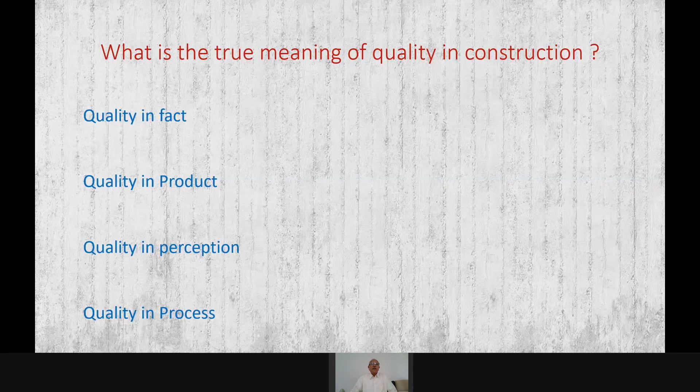So we will go one by one. What does this mean? Quality in fact means a product or service that meets the specification and truly exists - I say truly exists because many times we hear that something exists on paper only.

Quality in product relates to the physical product itself - that is the dimension, slope, strength, serviceability, everything. Then quality in perception - this is the perception of the end user regarding the product.

Now I will explain this with the example of a concrete road. If you see a concrete road in villages or a small town, you will find it is made of only 6 inches thickness, or even 4 inches in a village, limited width, and the surface is very uneven. Joints are filled or non-filled, maybe with bitumen or not, and the texture is very, very rough. The strength may be only M20, M25.

But if you go to the villagers and ask them, how do you find this road? They will answer, sir, this is one of the best works ever done in our village. Because initially during the monsoon season, everything used to be muddy - it was a hell of a trouble for us. Now this road serves many purposes.

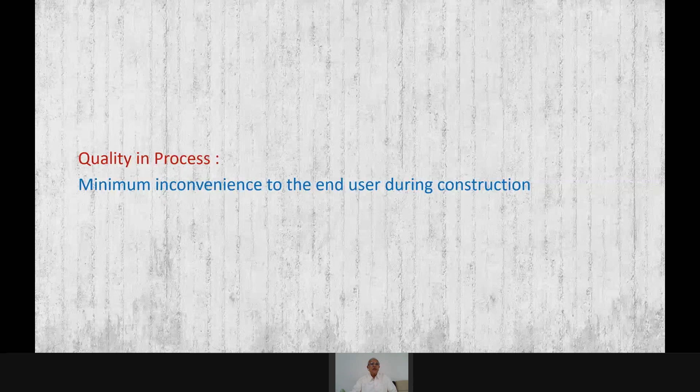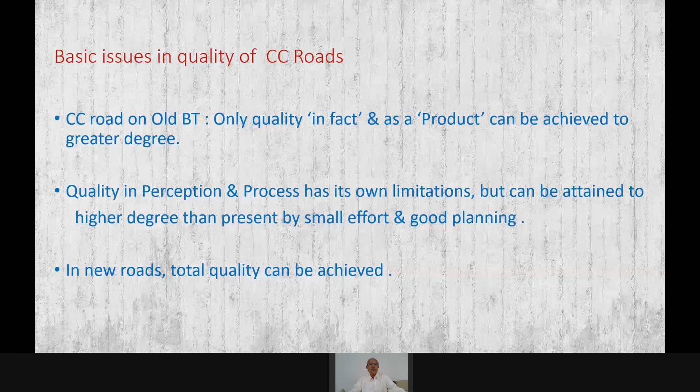The basic issues in quality: there are two things we find when a road is constructed in the city by removing the BT surface. We can create a good product, but we can lose on the ground of perception and process. But if it is a totally new road, constructed outside the town, then we can achieve total quality. So we'll see one by one how it is achieved.

The main factors affecting quality: first is the DPR, the detailed project report. Second is the quality of the construction material we are going to use. And third is the process of construction.

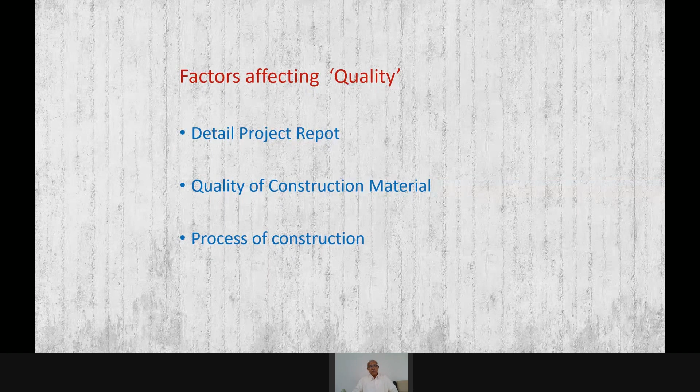Talking about the DPR, unfortunately it is never detailed enough. DPRs are prepared by inexperienced personnel many times, but cutthroat competition compels the consultant to minimize field work - investigation, survey, borrow area investigation, all these things. There are impractical time targets for DPR as well. Then there is inadequate soil assessment and almost no borrow area investigation. Unfortunately, the owners are not aware of the huge time and cost overrun because of these issues.

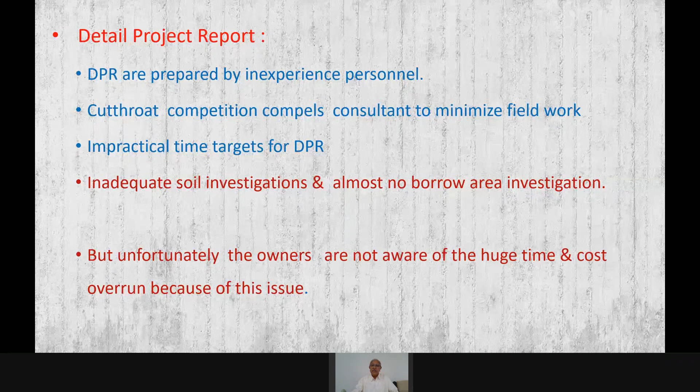I will go a little out of subject and show 2 or 3 slides on how we can suffer because of inadequate soil investigation. See this graph - if there is no investigation, your cost of construction can be as high as 100% above the predicted, and it goes on reducing as you invest in investigation.

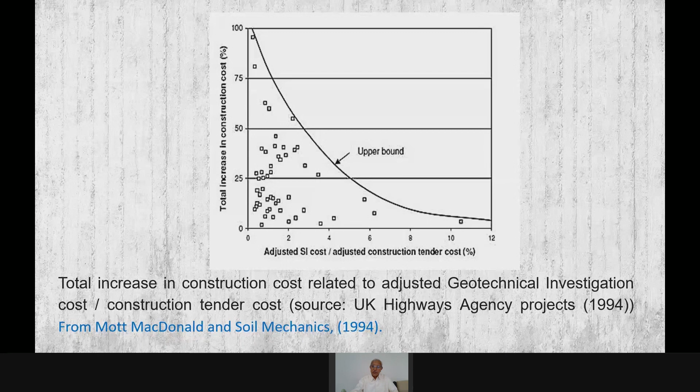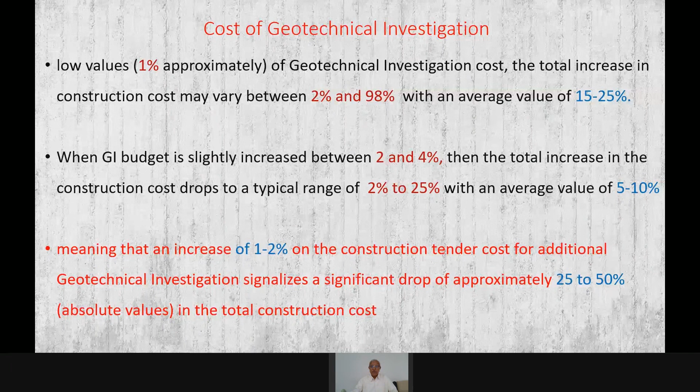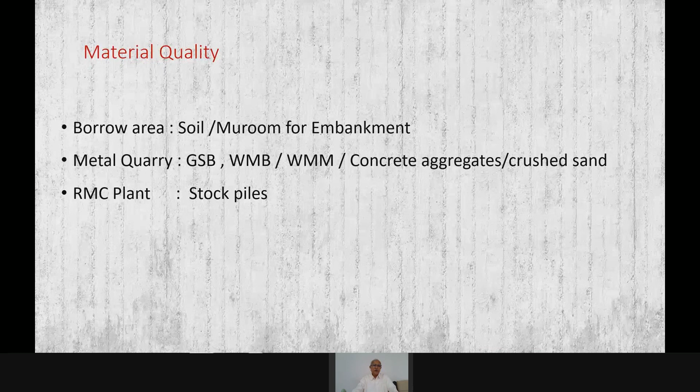Now going to material quality, we'll focus on borrow area investigation - the soil murum required for the embankment, and material required for the granular subbase, water-bound macadam, wet mixed macadam, concrete aggregate and crushed sand. We are not touching cement and admixtures or fibers because these are manufactured in factory under standard conditions and generally meet the standard specification, so we will not touch that here today. Third is the stockpiles at RMC.

Now this is another quarry investigation we did for a big project - a 340 crore project, almost 50-60 kilometers of concrete road. This material was investigated, and 6 quarries were identified during the DPR stage. When construction commenced, the department called us in to verify the material at the quarry. Out of the 6 quarries, only 3 satisfied the material requirement - quarries number 2, 3, and 4 - the rest did not meet the 8 CBR material requirement.

If you go into detail, even the PI value of quarries 2 and 3 was not up to the mark. So even if you approve these 3 quarries, the total quantity available is not sufficient, because these quarries are located away from all the points - they are in a specific location, and the contractor is not going to get material transported 50 kilometers. About this 8 and 9.5 CBR, I will explain further how this is also not possible.

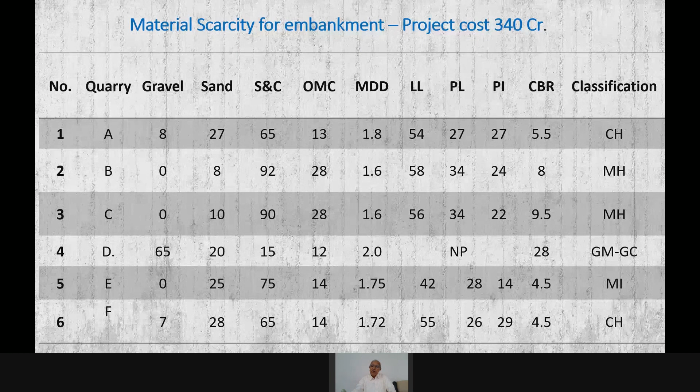So accordingly, we drilled 1 bore, 20 meters deep. The core records were excellent, everything was good. They established their plant and quarrying started, and they also started construction of the national highway. Initially they quarried the material for the GSB, and almost 1 kilometer of GSB was laid. Then the quality control team of the national highway visited.

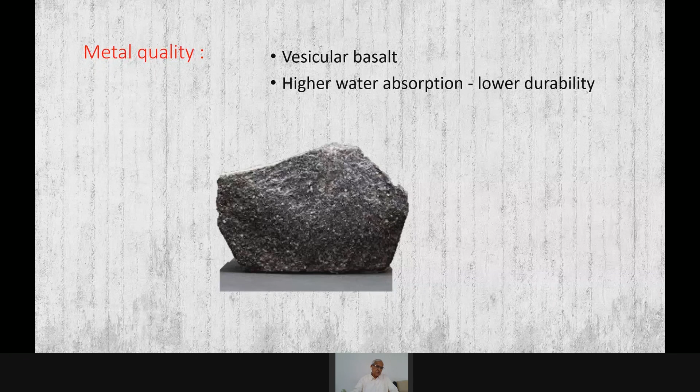And seeing this vesicular basalt, they rejected not only the material laid, but also the quarry. So the owner had to shift this entire quarry plant to a new location. You can imagine the time and cost overrun. So this is very important.

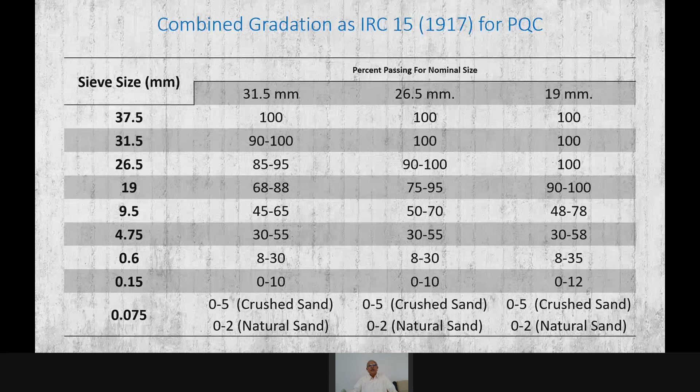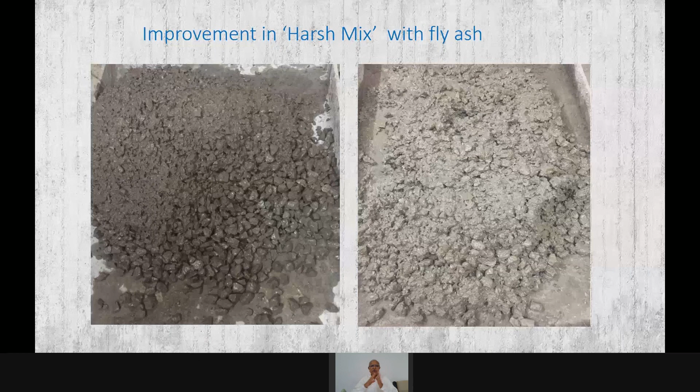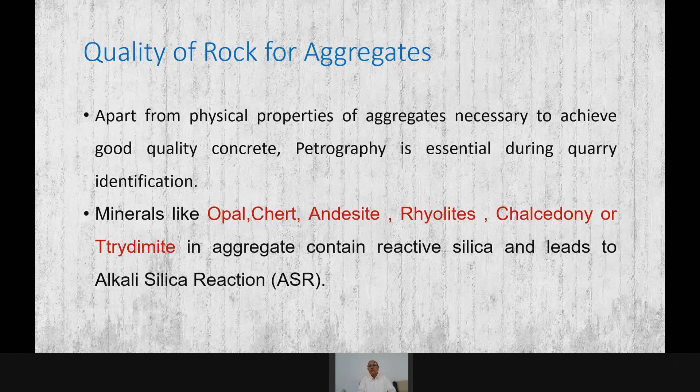See, for rock quality aggregates, we know that we don't want flaky, elongated, oversized, undersized aggregates - everybody knows that. I will insist on one part only, that is the petrography. Because minerals like opal, chert, andesite, rhyolites, chalcedony, tridymite contain reactive silica and lead to alkali silica reaction. So we must do petrography analysis of the quarry samples.

Then fine aggregate - now we are using mostly crushed sand, no natural sand is available. This affects the cohesiveness, workability and finish. This is the main thing - it affects the strength, and if optimized can increase the strength also. It shall be well graded, and each particle size of the fine aggregate has its own importance.

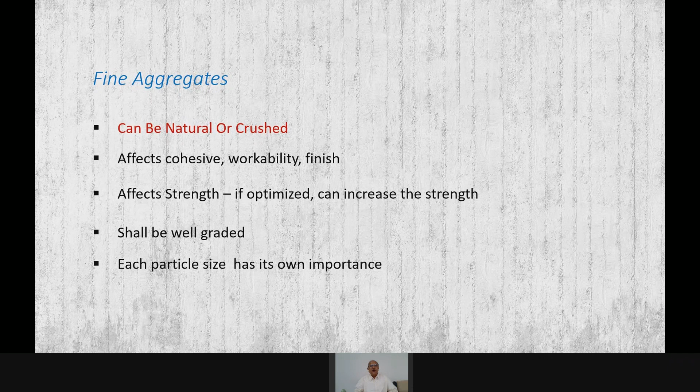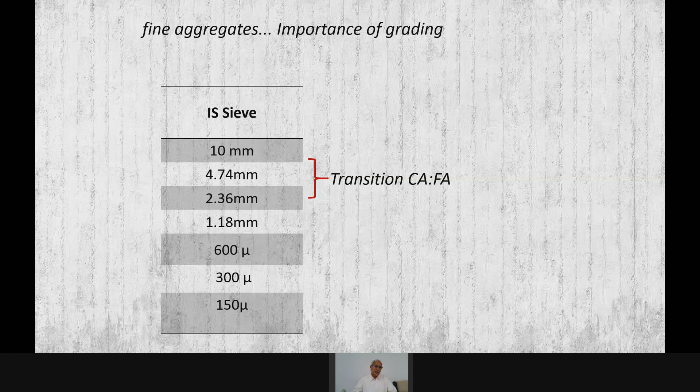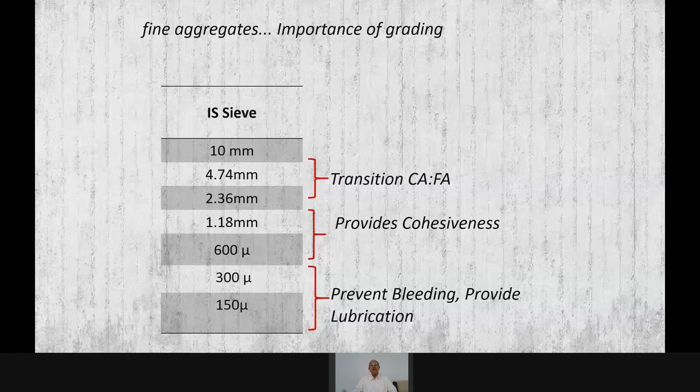So in short, this is the general aggregate size we use in fine aggregates. If you see the first two, 4.75 mm and 2.36 mm, this size is a transition zone between the coarse aggregate and fine aggregate - this material serves the purpose of transition. The two sizes 1.18 and 600 micron provide cohesiveness to the concrete mix. And the last two sizes prevent bleeding and provide lubrication to the concrete mix. So each size has its own importance.

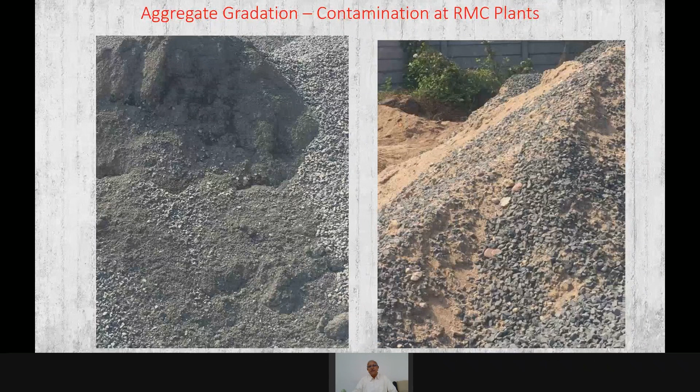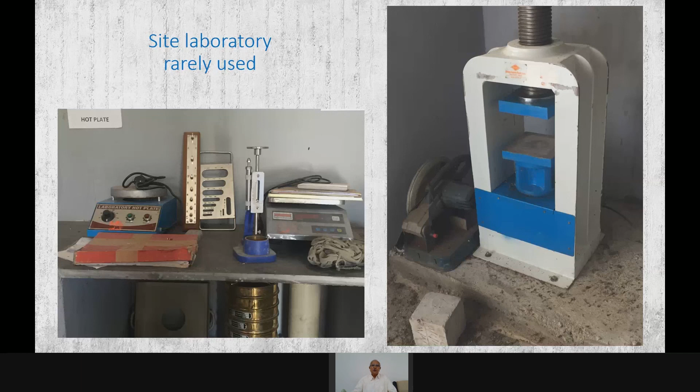And if you see the site laboratory of any contractor, I don't know why they have apathy towards the site laboratory. The instruments are placed but never used, and the quality of the instruments is also not good. You see, these instruments are never touched.

And this is the condition of curing tanks. A curing tank has to be planned - you could see this beam. If you ask the fellow to test the beam of a particular week, you see it is hidden inside. He has to remove everything, and even then it is not immersed in the water. The water has not been changed for weeks together.

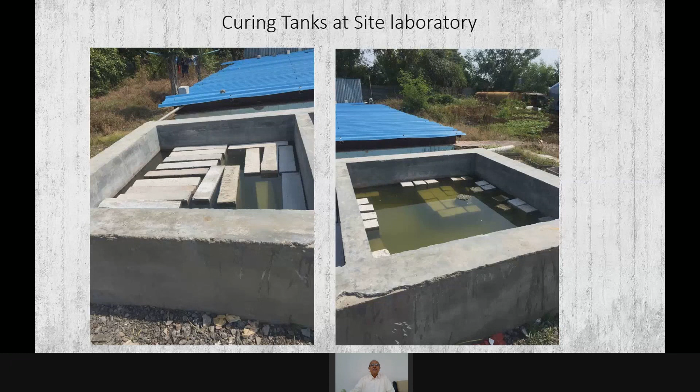So what we have to do is focus on quality and process. We have seen the material aspect; now in process we have two things - one is the personnel, another is the machinery and work methodology. All the personnel at site and in office should be trained. They must know each and every aspect of the construction, material and process at site. The training should be meaningful and practical.

And for construction of any layer, the trial patch is a must. Suppose we are doing the embankment - we take a trial patch of 50 meters and ask all the personnel to remain present, right from the laborer who is going to spread, to the roller driver, to the tipper person, to the engineer, to the site person, and to the office person - everybody.

And you spread the material. Generally what is the practice? The tipper will come, unload the material, the JCB will spread it. It will not be in a layer of 200 mm, 250 mm - it will be as thick as 300, 400, 600 mm, and you will just roll on the top. You will never achieve the desired compaction.

So in the trial patch, you spread the material, sprinkle the water, and give them the feel of what is meant by OMC, because you are not going to measure it at site. Give them the feel of what OMC means and how it should be checked physically on site. Then take the passes of the roller - 10 passes, check the density; 8 passes, check the density; 12 passes, check the density - and plot passes versus density on a graph, showing that at 12 passes you get the required density. So without any further thought, you ask them to give 12 passes every time, so your layer will never fail in density. Blindly doing 12 passes, it will never fail.

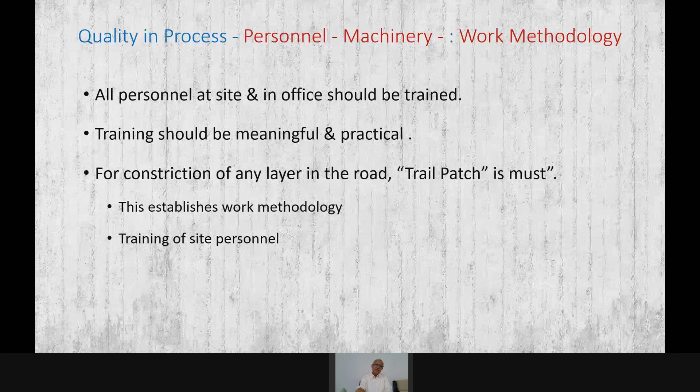Then these are the equipments. If you go to the equipment side, right from the DPR, we must take stock of the site and the contractor locally working and what kind of equipment they have. If you specify something very fantastic and it is not available, it doesn't work. This is one of the equipment.

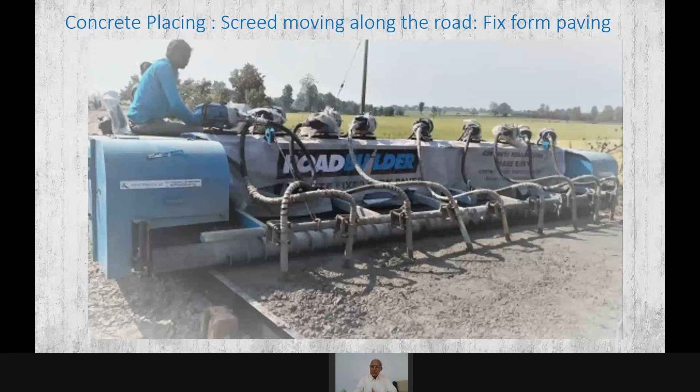It's a simple screed moving along the length of the road. Vibrators are there, it is spreading. There is another kind where the spreading is horizontal. And you see that roller, this never reaches the end. It will stop somewhere 1 or 2 feet away from the end, and you have to make a manual finish, and you see that man with the trowel is finishing at the end. So this is the limitation of this equipment. We must know this.

Of course, this is a very slip form paver, very modern equipment, but this is not possible to use in cities where the width is very narrow.

Then work methodology. At each stage of construction, work method has to be standard. Small deviations lead to various types of cracking. It is a wrong perception of the contractor that it costs more. Now I am talking about the number of passes and the work methodology. The contractor has his own perception. The contractor will say that if I do so many passes, I do this way, I do that way, it will cost me more. It is a wrong perception.

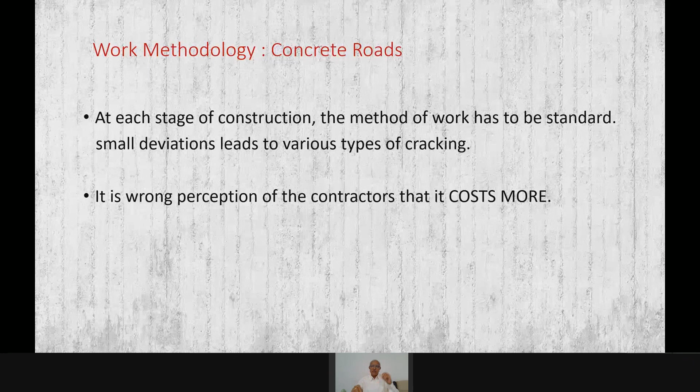So at various sites and during various training programs, we have proved this. I will show a few of them.

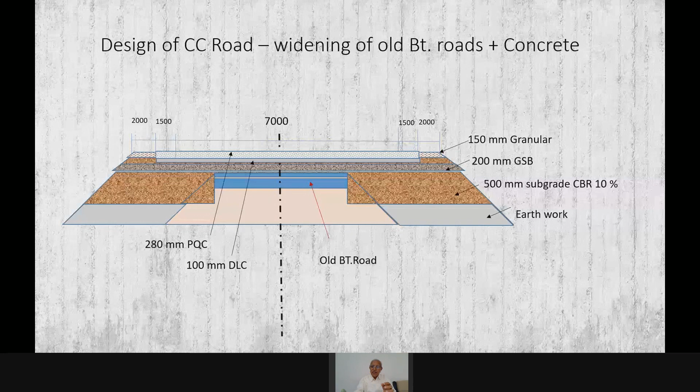Before that, if you see a typical design of widening of a BT road, an existing BT road, and widening while doing the concrete road, this blue line shows the existing old BT road. They are widening by putting embankment of 10 CBR material, then placing GSB and WBM and everything. Now, unless you do the benching, you will not get a good bond and transfer of load to the old embankment and old material.

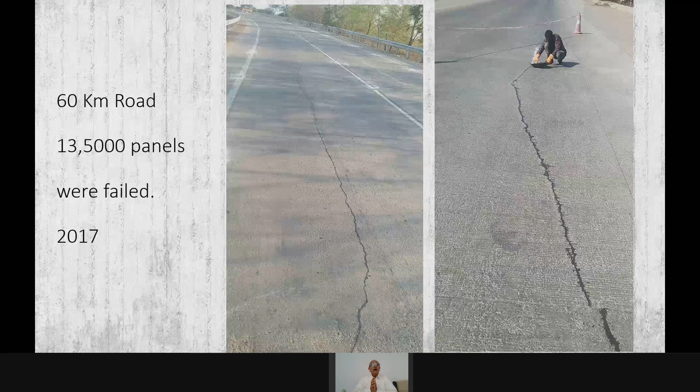Second thing is that if you don't compact, your widening will give cracks because of the loss of support. This is one of the 60-kilometer patches I have visited in MP. 13,500 and 5,000 panels - this is 13,500, well this is wrongly written - these many panels failed in a single road.

And if you see the CBR, you take the guidelines of IRC 37. If my subgrade CBR is 3 and I want an effective CBR of 10 at the top of the embankment, and my borrow area material is 10, then I should have a layer of 650 minimum. If I go for 10 CBR material and my thickness is 600, the effective CBR will be less than 10. So you have to follow these guidelines.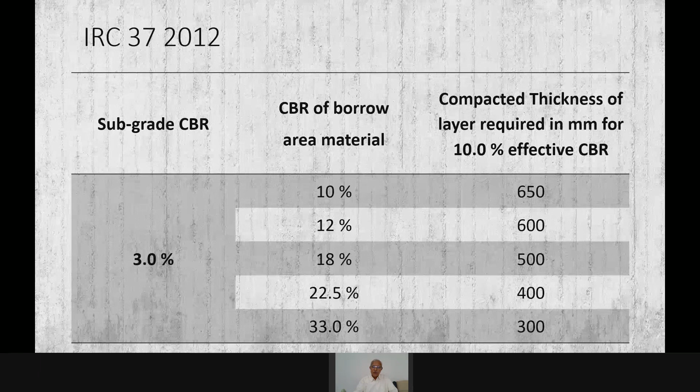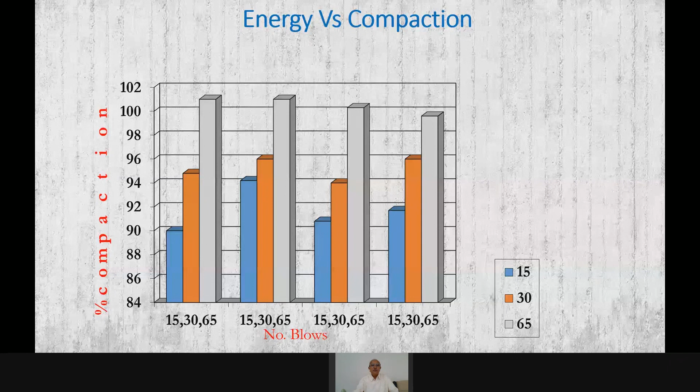So when you are looking at the borrow area material of 10 CBR and giving a layer thickness of 650 mm, if your compaction is not 100%, you will not get that CBR. With 90%, you will get only 3 or 4 CBR, and ultimately your pavement will fail in subgrade support.

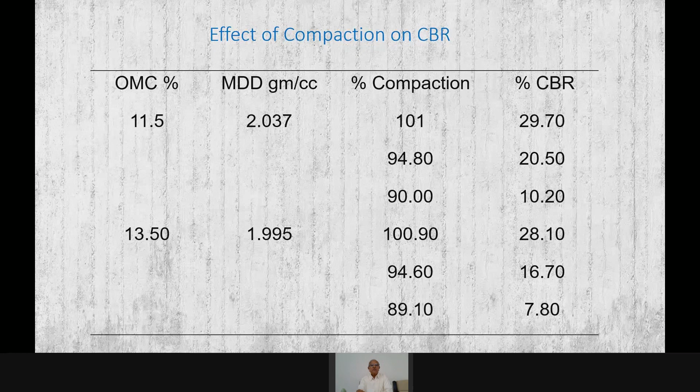Now, I will go a little out of the subject, just to show whether this type of compaction, this type of CBR and everything can be achieved on site. This is a road, a Pandhan road, taken by Pradhan Mantri Gram Sadak Yojana under the R&D.

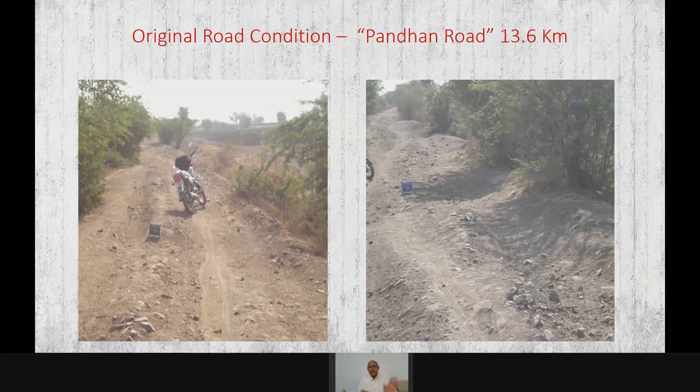Because there were so many roads failing in black cotton soil areas, they thought at least one road should be taken for R&D, research and development, to see what happens. So this was the road given to us by the chief engineer to study and build a perfect road. This road was 13.6 kilometers of black cotton soil, with free swell index more than 70.

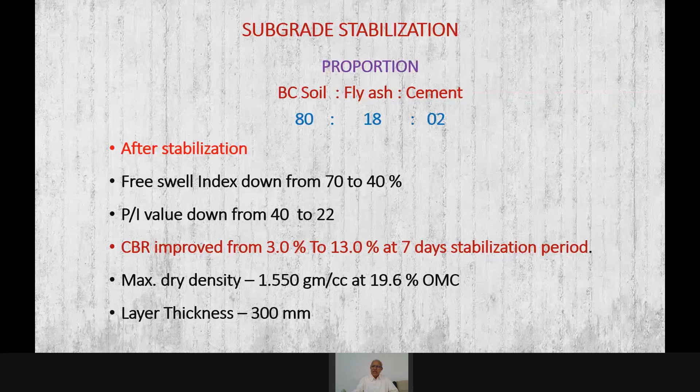We stabilized the subgrade with 80% black cotton soil, 18% fly ash, and 2% cement. The free swell index came down to 40, the PI value reduced to 22, and CBR improved to 13 in just 7 days. It improved further, so we excavated the drains and used that black cotton soil for construction of the embankment.

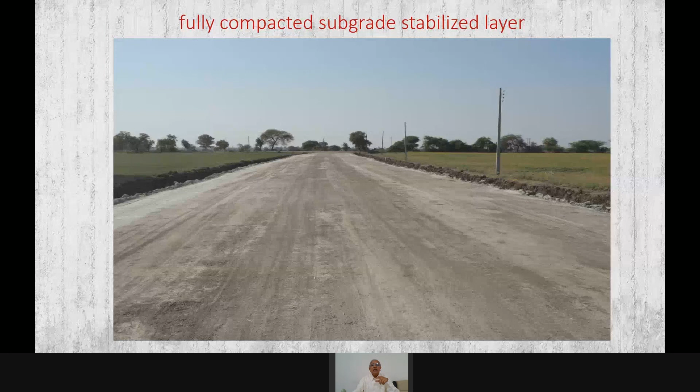This is the fully compacted and stabilized layer of the same road. During the monsoon, construction stopped, but traffic from all the villages and small towns continued on this stabilized black cotton soil. You can see the water ponded in the side drains. This is after the monsoon, and you can see the tire marks.

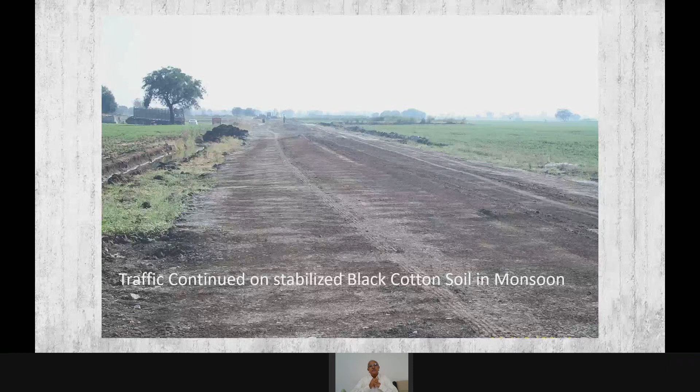And this is the road after 3 years. We monitored this road for 3 years, and there is no raveling, no tire mark, nothing.

This is after 6 years. During these 6 years, I had to show it to one of the superintending engineers who was in charge of concrete roads, with a 4,000 crore budget under him. He did not believe my slides, so he actually visited the site to confirm that yes, the road can stay.

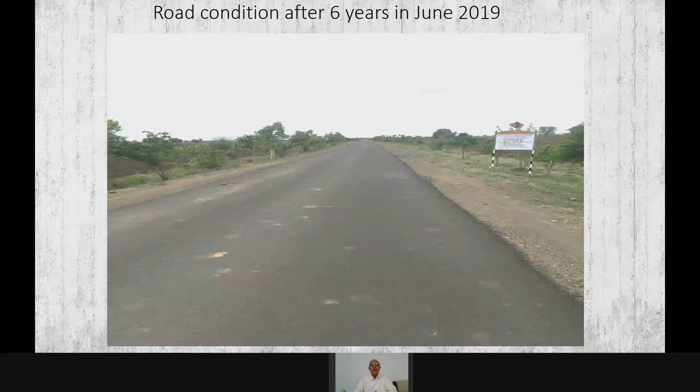So I had to prove that this doesn't cost so much for compaction. This is a simple case: if you take a 3.5 meter wide road, you need 2 passes to cover the entire width. For 98% compaction you generally achieve it in 10 passes of rolling, but let's consider 15 passes, a 50% excess. Then consider 1 kilometer, 2 passes, 2 layers meaning 2 lanes, and 3 types of material to be compacted in 2 layers.

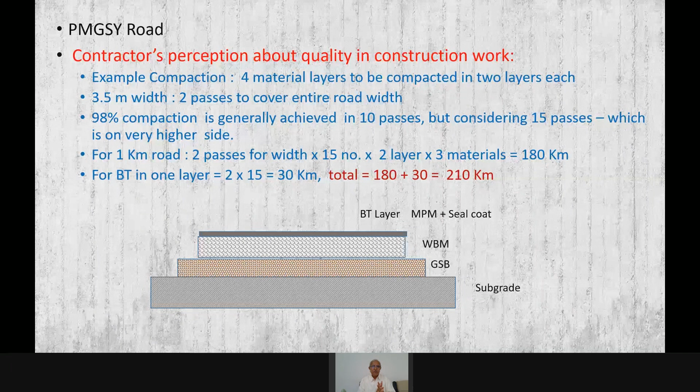In total, 180 kilometers is what that roller will have to travel. Then for the BT layer, it will have to travel 30 kilometers for 15 passes and 2 lanes. So 210 kilometers total the roller will have to travel for compaction of all standard layers. Now for costing, these are the latest machinery rates as per PWD: 1591 rupees per hour.

So I took 5 kilometer speed, which comes to 42 hours, but let's consider 50 hours. That costs 1 lakh. Water tanker will cost 40,000. So actually total cost of compaction is only 1,40,000, but I've added 40% profit, 35,000, and other expenses 25,000 — this is all exaggeration. Still it is not costing more than 2 lakhs, and the cost of 1 kilometer road is 80 lakhs. So it's only 2.5% to spoil the 80 lakh rupee road. So remember, good compaction is the heart of road building.

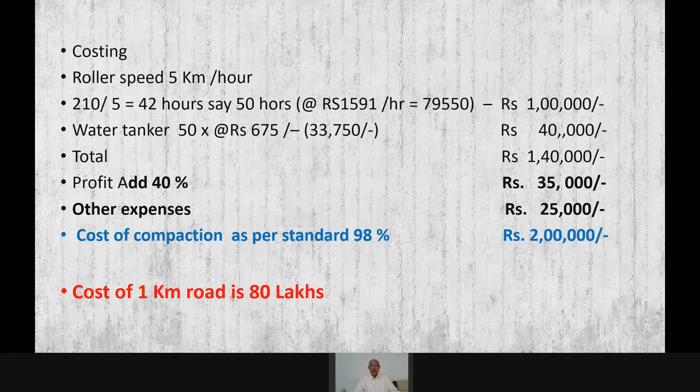Then comes the dry lean concrete in the concrete road. This is generally M10 grade concrete. It creates a firm and continuous support for the pavement quality concrete. It should be well compacted at OMC, just like any other material in the embankment, murum or soil — we have to compact at OMC.

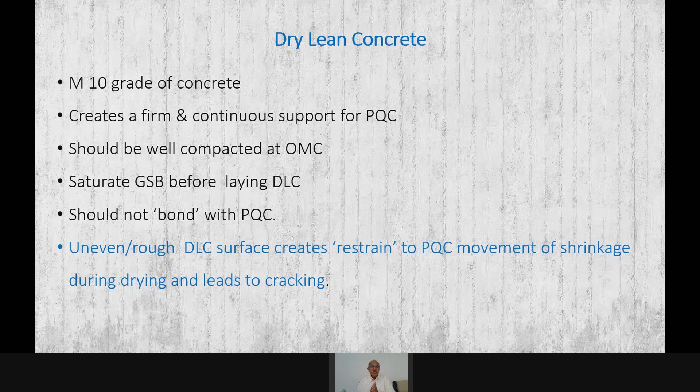Saturate the granular subbase before laying the DLC. It should not bond with the PQC, so we place the separation membrane. An uneven and rough DLC surface creates a restraint to PQC movement during drying shrinkage, and this leads to cracking — you can see this.

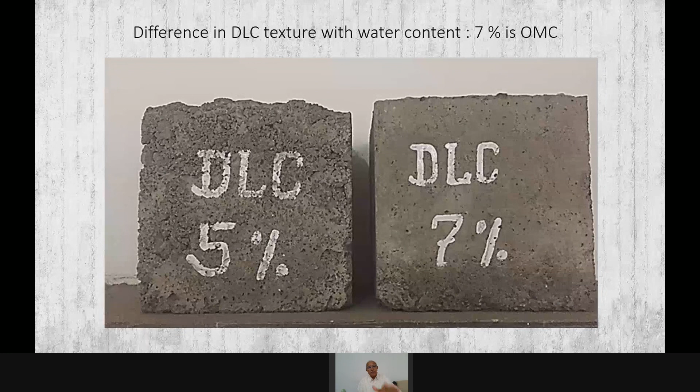These are the 2 cubes showing dry lean concrete compacted, with the only difference being moisture content. One is compacted exactly at OMC, and the other has 2% less water. You see the difference in texture. If you compact this dry lean concrete layer with less water, it will have a rough surface, and ultimately the concrete road will crack in this fashion, because during drying shrinkage this DLC will offer resistance to the shrinkage, causing cracking across.

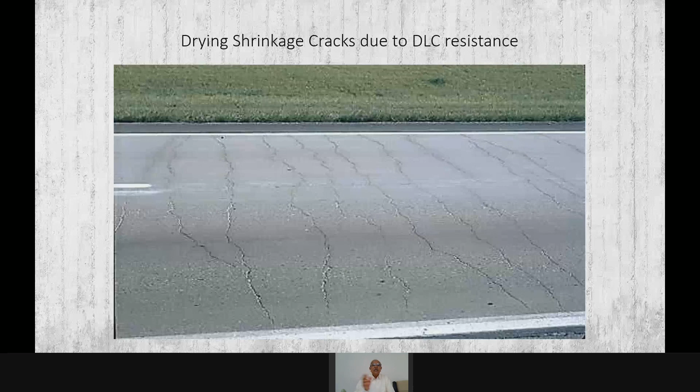When you go to the pavement quality concrete, generally the RMC is mixed in the plant and brought to the site by transit mixer, poured at site, mostly in a heap. Mostly you will see a general scene where a few laborers spread it with a vibrator. Actually, the vibrator is not the right equipment for spreading — this imparts excess vibration and leads to segregation and bleeding.

And then retention time of the concrete is very important. During the trials, you must ask one transit mixer from the plant to reach the site. You count the time taken to reach the site and the time for unloading, so you know exactly the time cycle required for reaching the site and unloading it.

Accordingly, you fix the time cycle for the transit mixers. Otherwise, this is the general scene all over: one transit mixer is unloading while 3 or 4 are standing in line waiting for their turn. Their retention time then exceeds, and secretly the person there will have to pour extra water to keep the mix workable, and ultimately the strength of concrete will reduce.

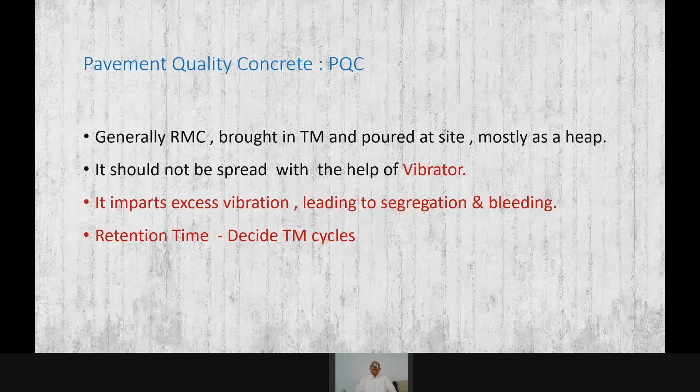Secondly, this is the general experience all of you have had: the riding quality of concrete roads is not as good as bituminous roads. You will find bumping in all of them. Very few roads have good quality.

The standard specifies the longitudinal profile unevenness should not be more than 5 mm, and 4 mm in the transverse direction. For frequency, it's 15 numbers of unevenness in 300 m for national and state highways. But you always find unevenness is more than 5 mm and the frequency is far more.

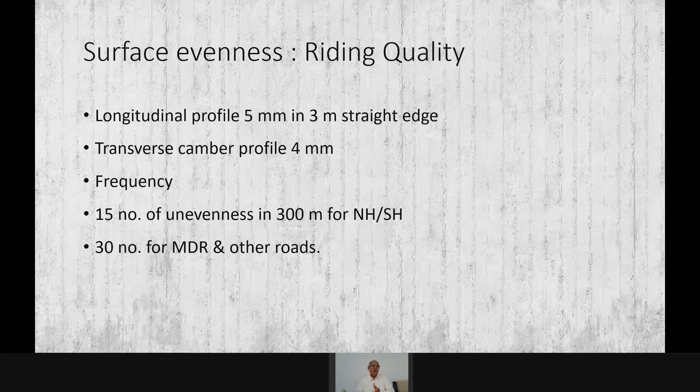This is exactly what gives bad riding quality, and it is only the result of change in workability of the mix received at site. Sometimes when it receives late, the workability is less, the concrete mix is stiff, and when you lay it there is no ponding, so after finishing the surface remains as it is. If the workability is more, little ponds form, and after evaporation they create unevenness. That is the main cause. So the workability of the mix delivered at site should be monitored and kept even. Then only will you get good riding quality.

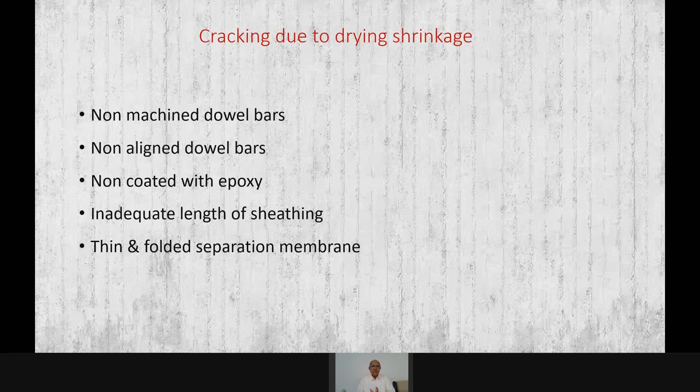Then cracking. There are many reasons for cracking, but we'll talk about the things which are in our hand and which we can control. When you place non-machined dowel bars, not coated with epoxy, non-aligned, with inadequate length of sheathing and thin folded separation membrane, these lead to drying shrinkage cracks.

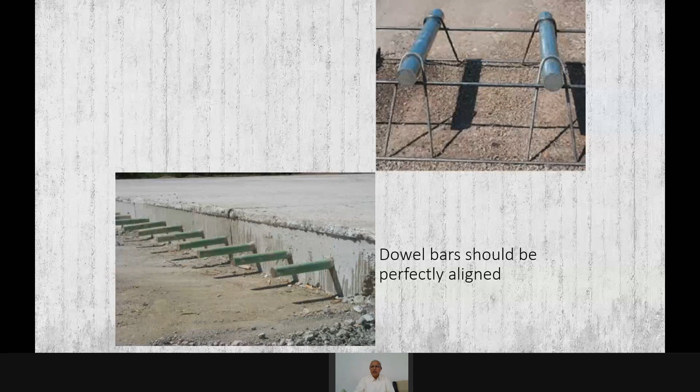See, these are the dowel bars done correctly: machined, epoxy coated, everything done properly. And these are dowel bars that are not machined, not epoxy coated, and not aligned. This type of dowel bar will invariably give you a drying shrinkage crack, generally 1 meter away from the joint. This is the type of crack you will observe.

Cutting, the joint cutting. This is the hydration cycle of the first 72 hours. The first 15 minutes is the mixing time, then 2 to 4 hours is the placement time. Then 4 to 8 hours is plastic shrinkage, and after that differential thermal shrinkage starts. Strength development starts somewhere in between, and you get a small window for jointing.

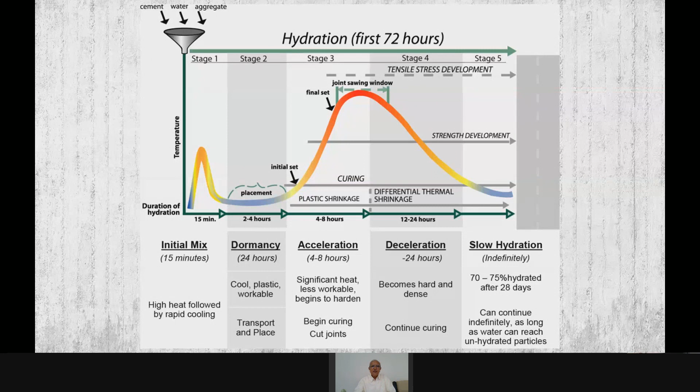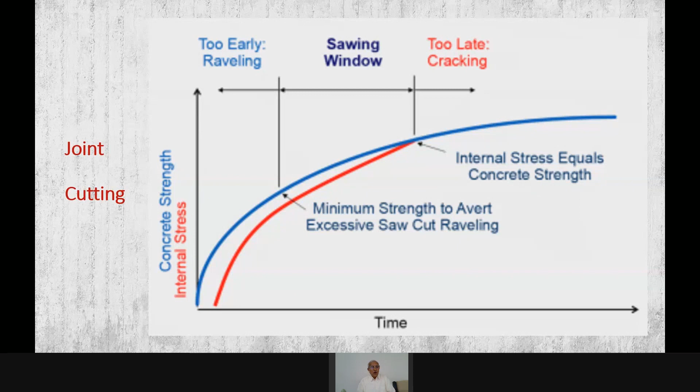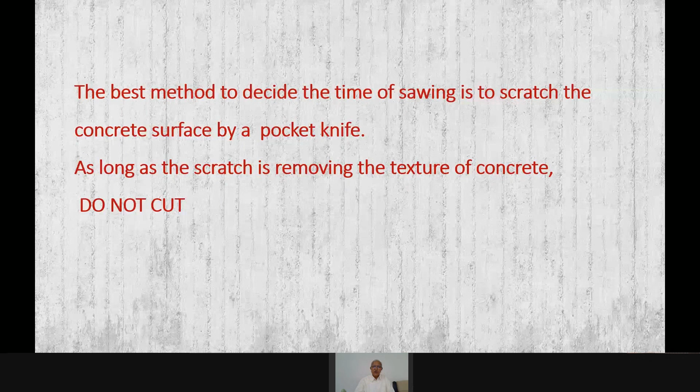If you see largely, this is the window of time. If cutting is too early, it will give raveling; if too late, it will give cracking. So how do we control this? On site there is a simple method: the best way to decide the time is to scratch the concrete surface with a pocket knife. As long as the scratch removes the texture of the concrete, do not cut. Once it gives a clean cut without removing or disturbing the texture, it is time to cut. This comes with experience, and it will change from season to season.

These are plastic shrinkage cracks caused by delayed jointing.

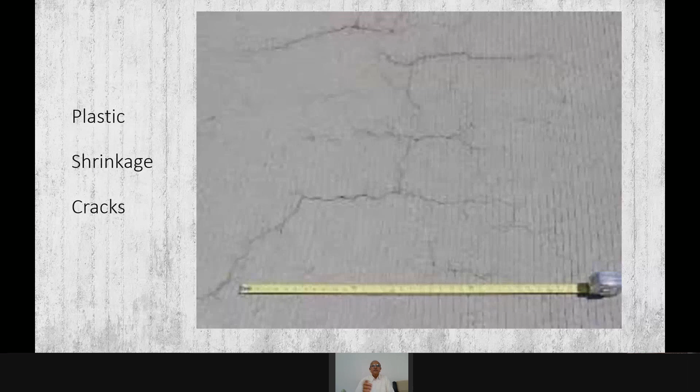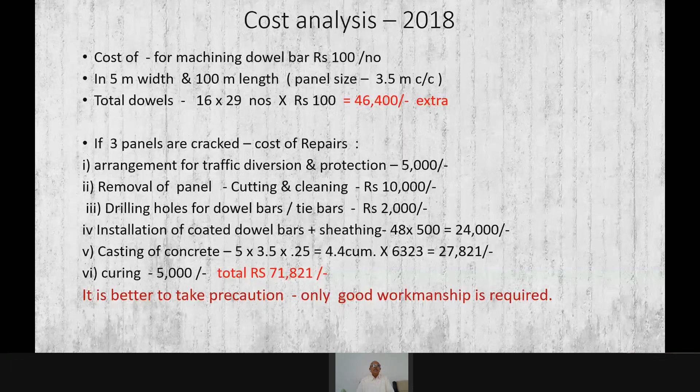Now, coming to the strength of pavement quality concrete, which is vital. All standard procedures are applicable to achieve the concrete strength.

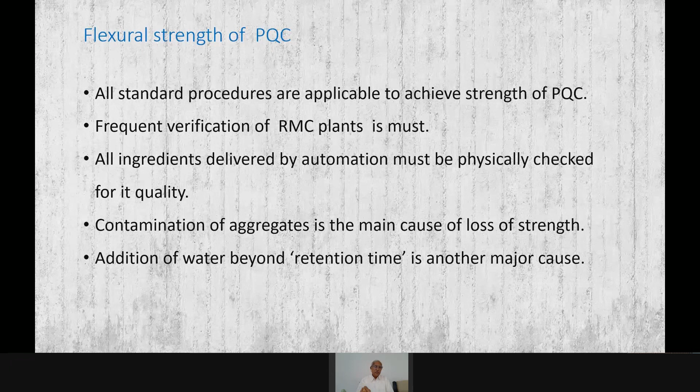Frequent verification through RMC plant visits is necessary to validate the ingredients delivered by the automation system physically. You give the command to the computer to deliver the aggregate, and you weigh the aggregate, water, admixture, everything physically, and validate whether the RMC plant is actually delivering that quantity as per the design mix. Secondly, contamination of aggregate at site and addition of water beyond the retention time is the major cause of loss of strength of the pavement quality concrete.

Now you see the picture. This is the contamination of aggregate, insignificant aggregate due to segregation. There are hardly any coarse aggregate in the mix.

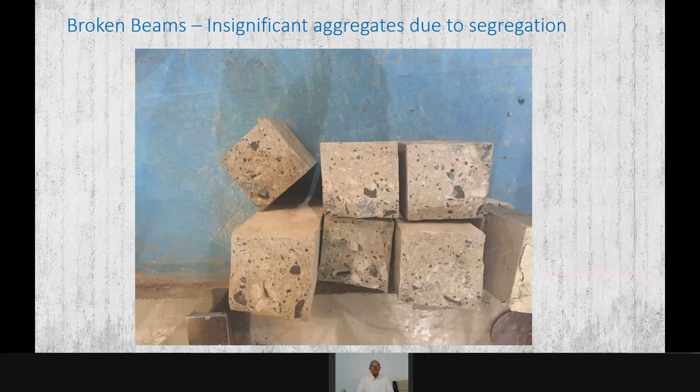Now, when we talk of the so many constraints, so much quality and so much of regularity and controls, one may think that it is not possible to achieve high quality of concrete over a long time, but it is not so. I will just share 3 slides.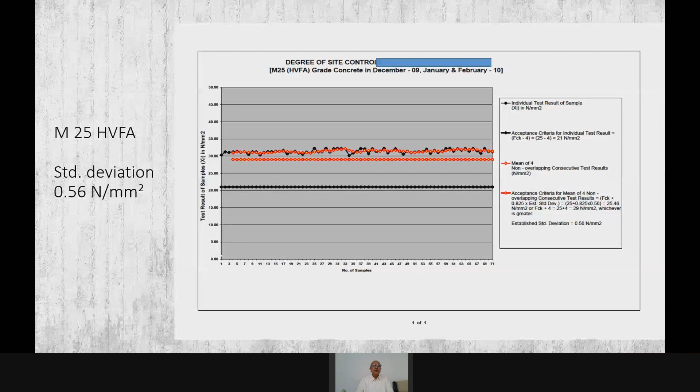This is M25 with 30% fly ash. Standard deviation was only 0.56. This is M35 normal concrete. Standard deviation was 0.68 Newton per mm square. This is the quality, and this quality can be achieved.

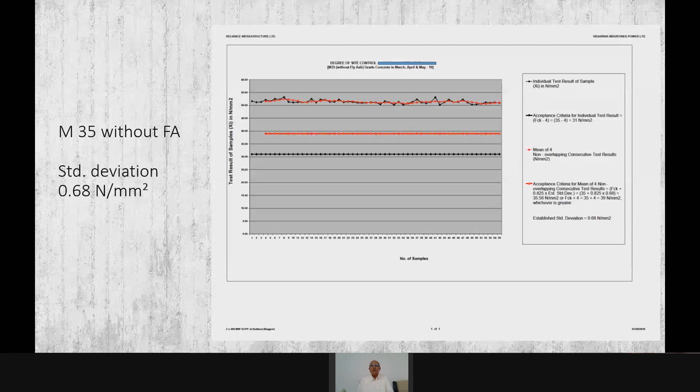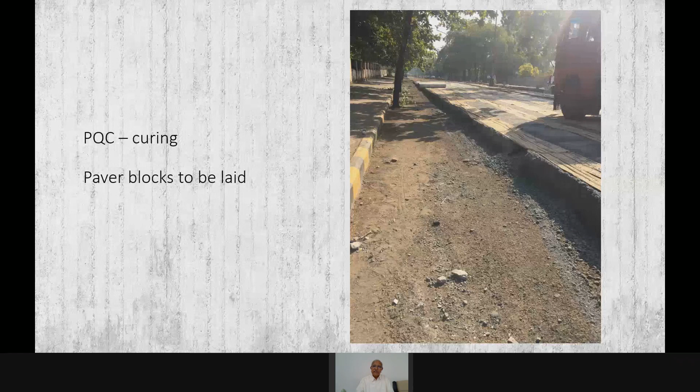And when he is laying those paver blocks, you see the amount of dust he is putting under that. This is almost a 60 centimeter stone dust placed under the paver block. How it is going to stay?

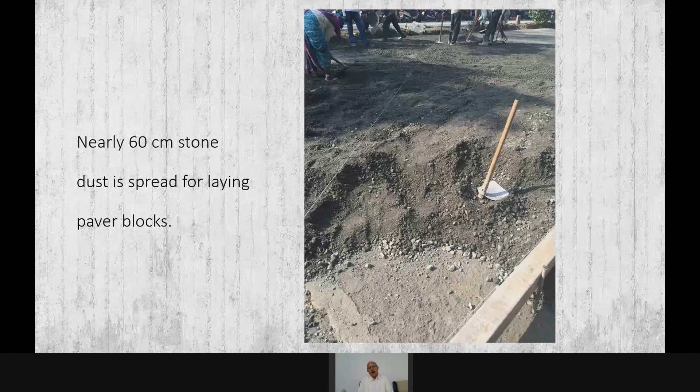Then the utilities we tackle. This is a manhole, and surprisingly, in front of the municipal corporation member's bungalow. I don't know what is the methodology of this. I think whether everybody wants to see it, or they want to show everybody that you go around this and don't cross over it.

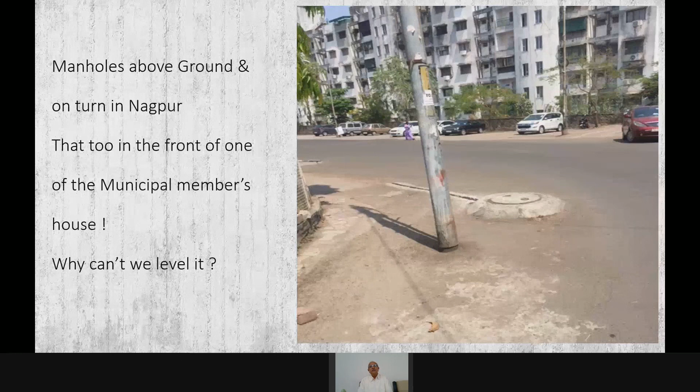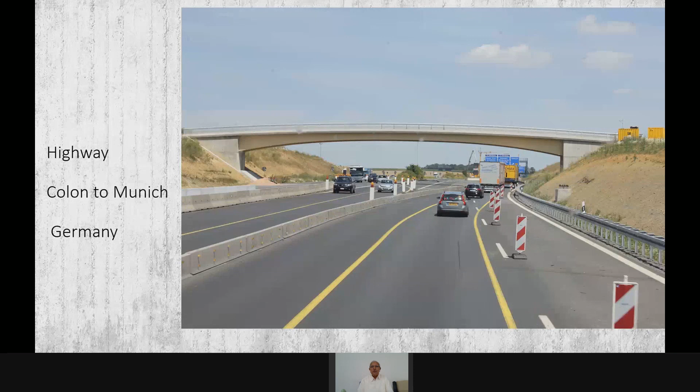Quality can be achieved. Just I'm showing few photographs. Now, when we did the quality assurance for the 70-kilometer road network in Nagpur city, I will share you in short what we did. We trained all personnel of the contractor, of the municipal corporation engineer, and everybody.

We made the supervision at site. Generally, the supervision at site by consultant or PMC is like policing. It is not like that. When you visit the site, it is again a site training. It is a guidance, it is a problem solving. It's spot decisions you must take. Whatever they are facing, you must correct it then and there. Then it is a quality supervision. Otherwise, it is only shouting and nothing else.

Then sampling and testing, then RMC, we visited each and every RMC plant regularly every month, verified that, drew the sampling and tested that. And we gave all factual reports to the corporation, to the commissioner and everybody. Now, when we were working in city, this is the point of quality, that is why I'm discussing. Then interaction with the end users.

I will tell you here one of my experiences. There was a road we were constructing that was exactly in front of Nagpur High Court, and all the High Court judges, during office time opening and closing, their gates open on that side. So I requested all the contractors and NMC engineer to take that half a kilometer patch during the summer when there are vacations to the High Court. But 1 month High Court will close for the vacation.

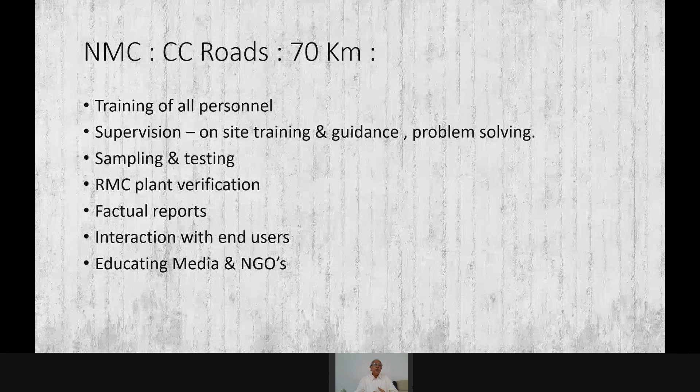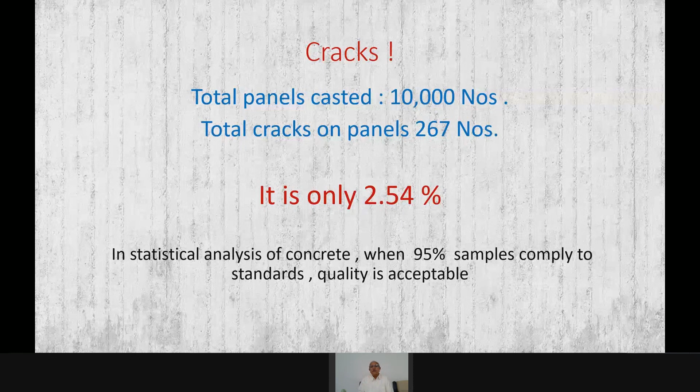So the cracks are inevitable. Out of 10,000 panels, only 267 panels cracked, and these are minor cracks, not major cracks except 1 or 2. This is only 2.5%, well below our standard deviation. The cracking is the main issue, because when you take a bitumen road, there is no cracking. There can be local depression and nobody shouts. But if there is a small hair crack in the concrete road, everybody will start complaining.

So I showed them what the IRC guidelines say. I showed this to the NGO and media persons. These guidelines, apart from suggesting various repair techniques, are also aimed to offset the impression that repairs of concrete pavements are something impossible, and therefore the construction should be avoided. It is not like that. It is bound to crack, because over such a great length, you cannot inspect each and every meter of what is beneath, and you cannot control even the quality of the embankment because it is spread over a length. It is not a small slab, it is not a small beam.

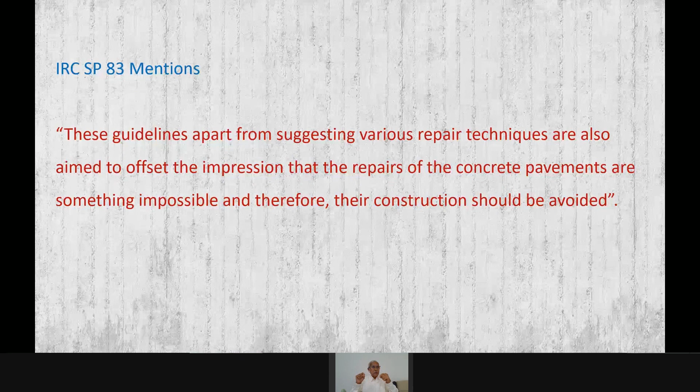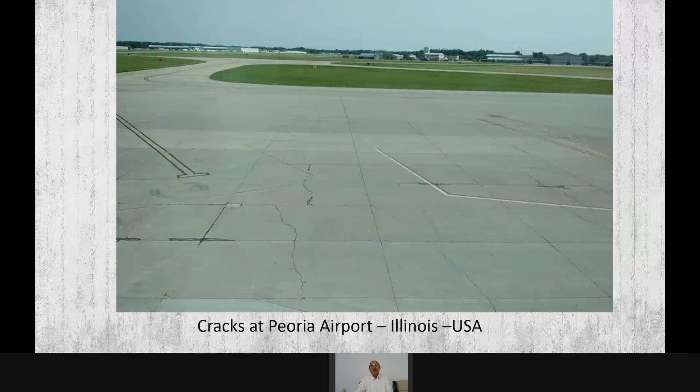And when we gave a seminar at ICI Pune Center, this is also our cracked tender - we are repairing Pune Airport. There was a tender in 2013. Yes, there were cracks and they were repaired, but cracking is always there and it can be repaired.

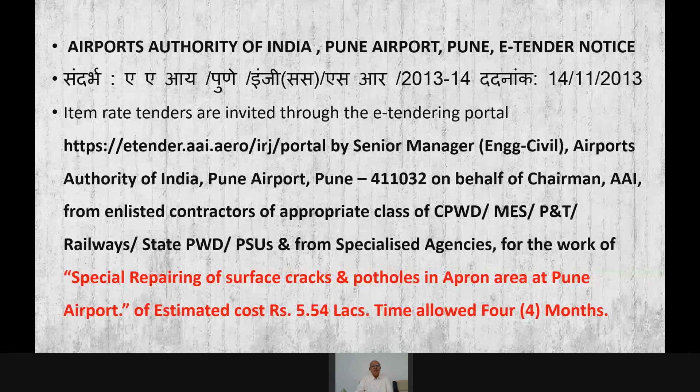So this is then how to implement all this. First thing is quality management, detailed planning, then it is teamwork. Job responsibility has to be there, it should be defined. Then motivation - motivation is a must, this is the job of the leader and owner. In civil engineering, we lack training - there is no training, no motivation. Everybody goes to site and shouts at the top of his voice. It is never done that way, you will never get the quality.

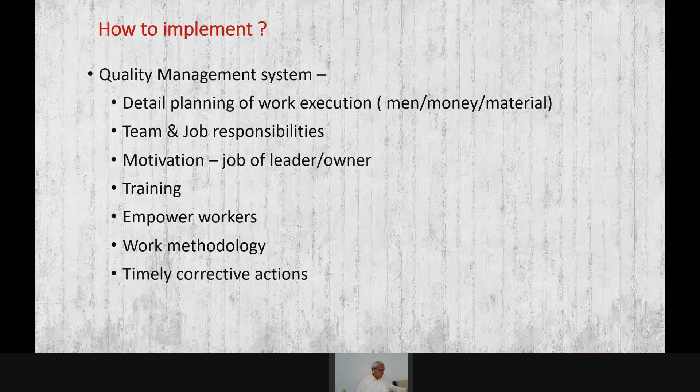Empower workers. I have seen a site supervisor not even having the power to spend 100 rupees - suppose workers are working a little late, he doesn't have the power even to offer them a cup of tea. It should be there. Then, timely corrective action. If you do all these things together, I am sure 100% that you will always get the quality. So remember, quality does not mean cost. Quality begins at the top and it is teamwork. Mainly, if you see the Indian condition, you have to change the thought process and build the culture of your organization - then only can you impart quality.

So I conclude here and I give sincere thanks for your patience.